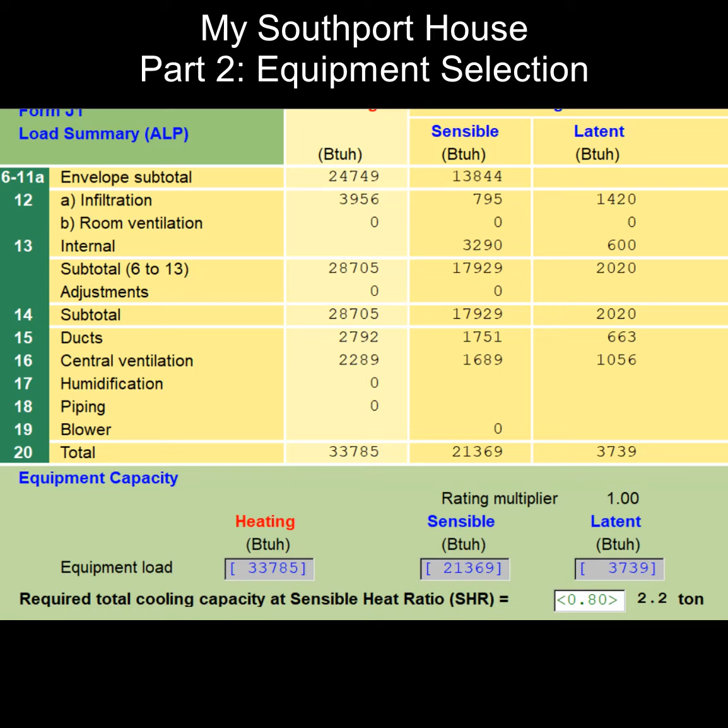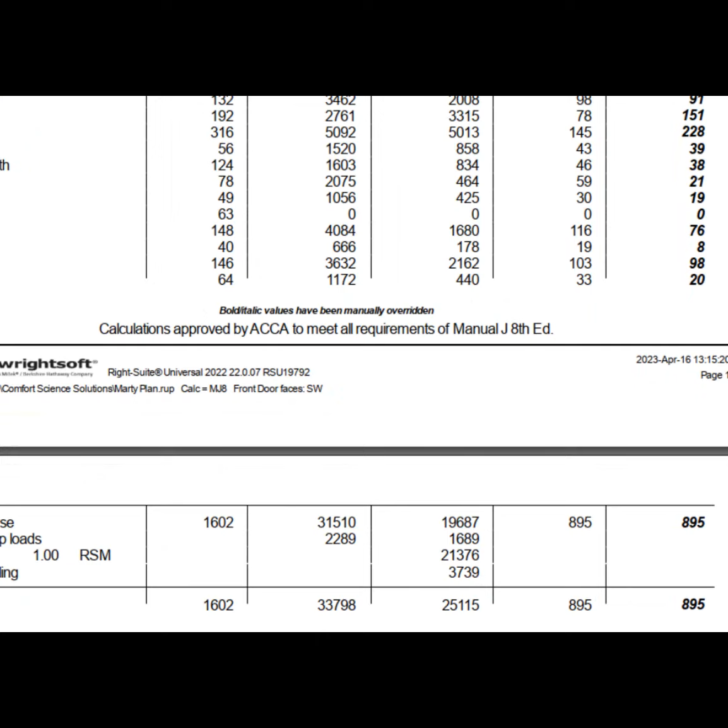Since the last video about my house, I sharpened my pencil a little bit more and got my load down from 2.5 tons to 2.2 tons by shading my windows, since we were probably going to have blinds and curtains anyway. My total airflow is now 895 CFM at this load. Now it's time for me to select my equipment.

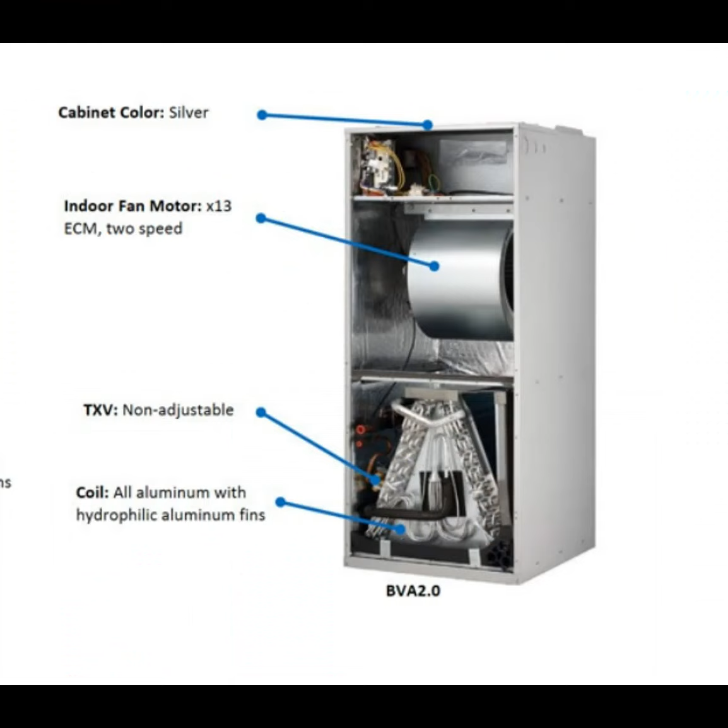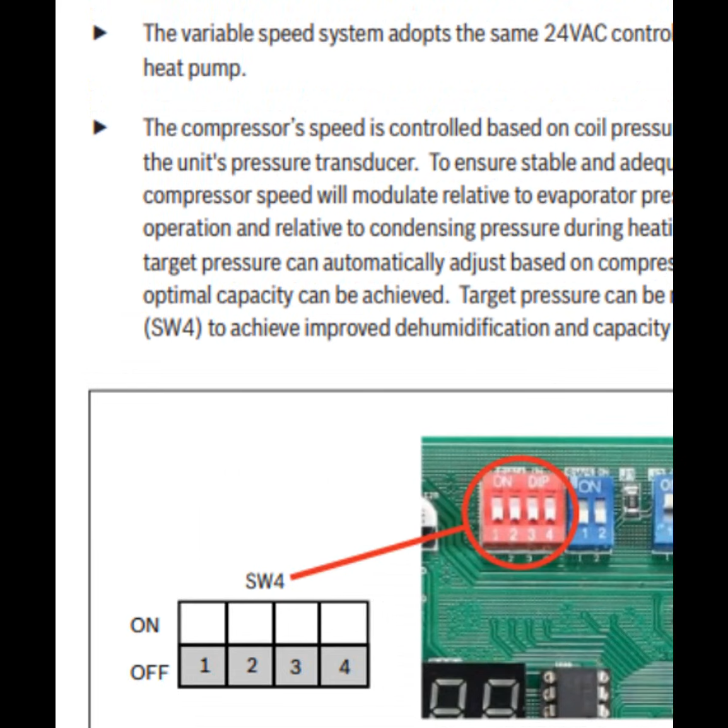I was really torn between two different approaches, a Bosch IDS 17.5 SEER and a Carrier Greenspeed 5-stage. Both have inverter compressors, but they control the compressor speed in two very different ways. The Bosch uses an ECM 2-stage blower that you would wire up to a typical 2-stage thermostat. The compressor is programmed to make a 47-degree evaporator coil, so it can just ride with the load and airflow settings and still provide very efficient cooling.

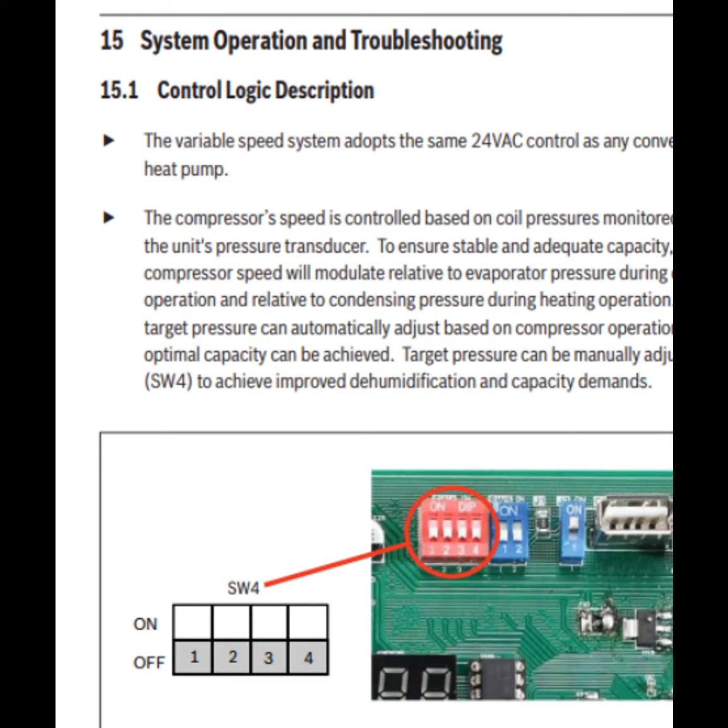It can also run on an Ecobee thermostat or any conventional thermostat. You can also turn on what Bosch calls enhanced cooling with some dip switch settings. Also noteworthy is Bosch only makes a 3-ton and a 5-ton condensing unit. The 3-ton can be set to 2 tons with another dip switch. It offers a 2 and a 3-ton air handler to match with that condensing unit.

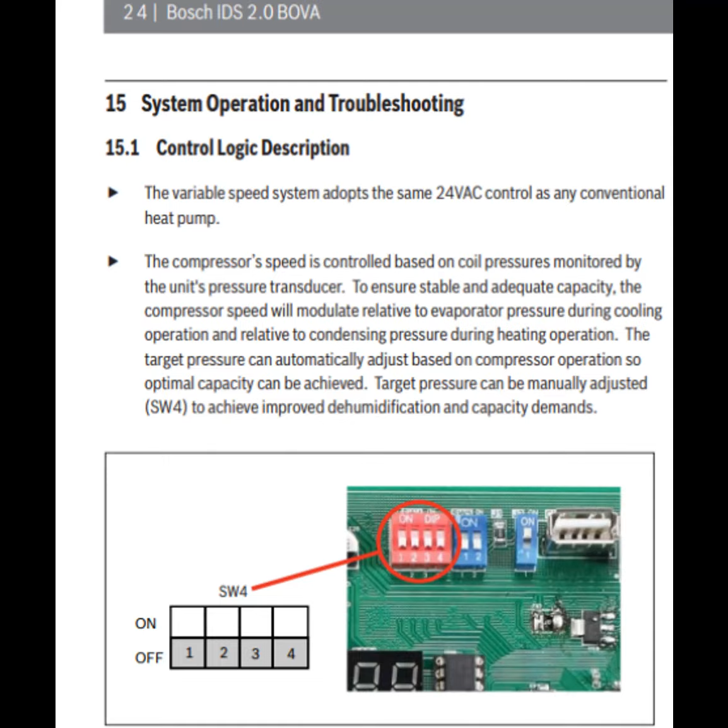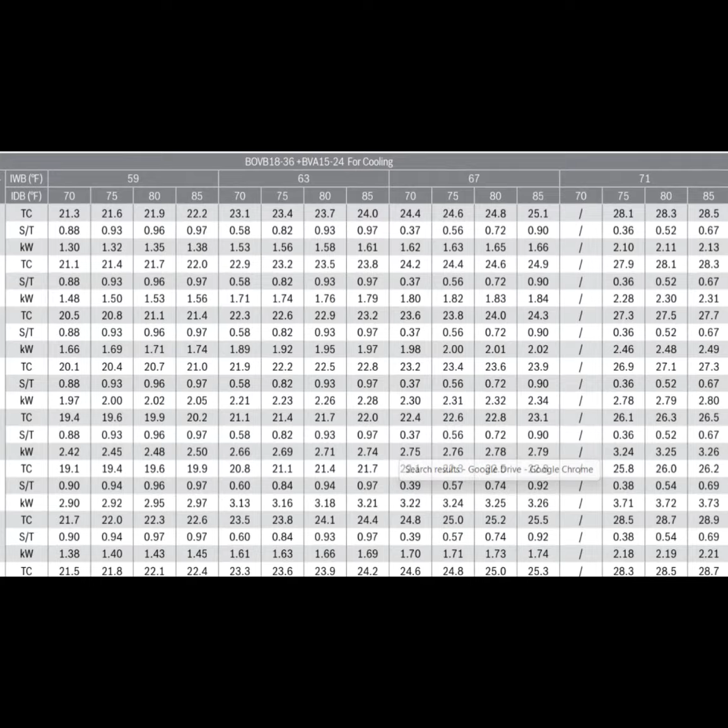The Carrier is a fully communicating system. You must use its Infinity thermostat to get all the features out of it. Bryant and ICP are sister brands that also have the same technology under different trademarks. Bosch publishes its performance specs for normal mode only. I could not find performance specs for enhanced mode, while Carrier publishes two different modes, efficiency and dehumidification mode.

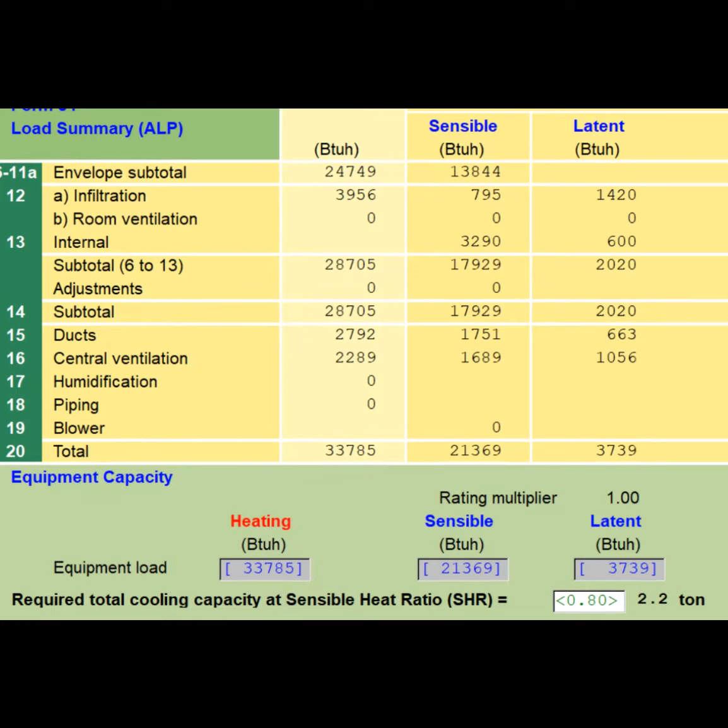I was really in between a 2-ton and a 3-ton. We always teach students to size their systems aggressively and avoid oversizing equipment. The standard for selecting which tonnage to use would be Manual S from ACCA, which says that equipment has to be within 90% and 130% of our sensible load if we're using a variable speed compressor, and we must meet or exceed our latent load.

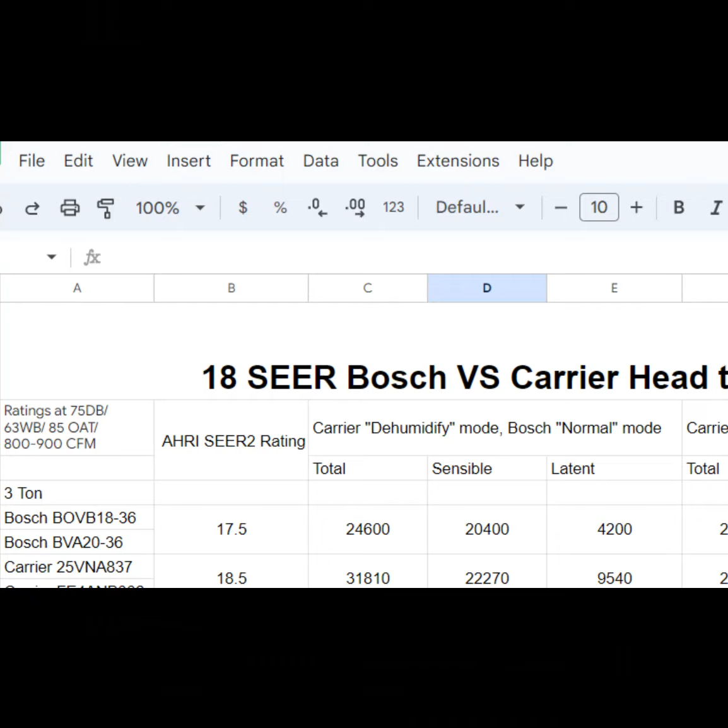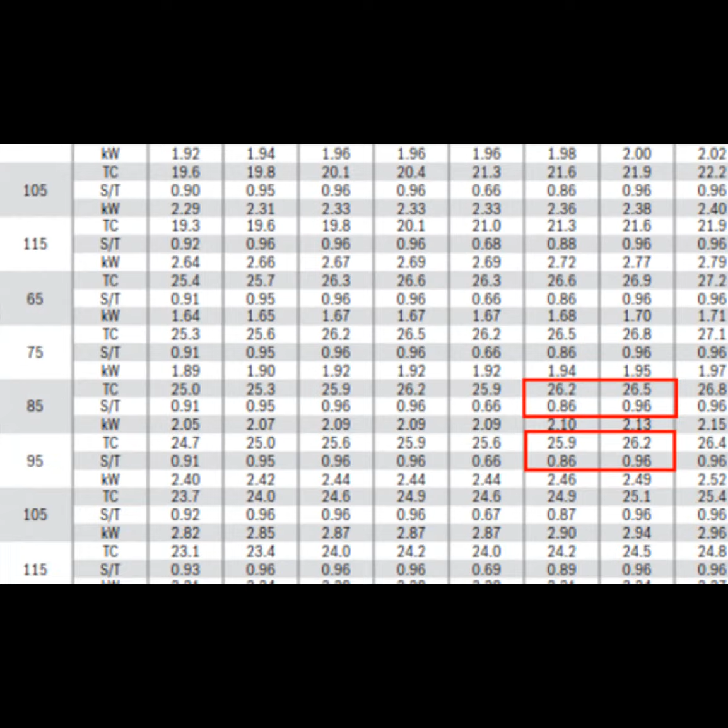So I created this spreadsheet to compare the two brands at the same design temperatures and similar airflows at 2 and 3 tons. The Carrier 2-ton would not meet the sensible load, so it was out. The Bosch 2-ton met my sensible load, but it did not meet my latent load. The only way it would meet it would be with a dehumidifier. And I didn't like the idea of relying on the dehumidifier during peak design conditions to remove moisture. So per Manual S, these 2-ton units would not work. At 3 tons, both systems comply with Manual S in sensible and latent capacity.

Now let's pause for a minute and compare the performance between the Carrier and the Bosch. The Carrier absolutely crushes the Bosch in latent capacity, which is its ability to remove moisture. The Bosch makes up for that shortfall in more sensible capacity. The reason is the Carrier runs a very cold evaporator coil, and it can really wring out the moisture from the air.

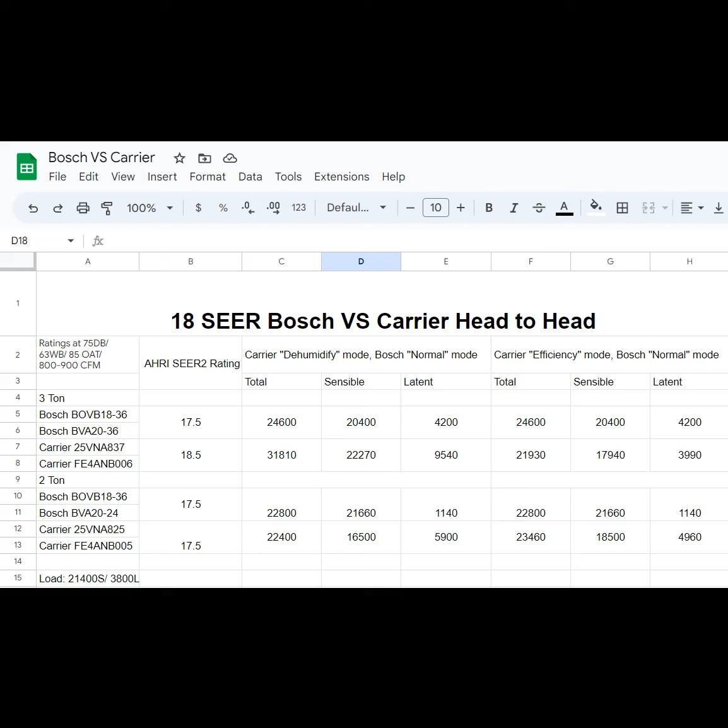Now remember, there is an unknown here. The chart only lists the Bosch's capacity and performance in its normal mode. When we set it to enhanced mode, it's going to allow the compressor to pull the evaporator temperature down to around 43 degrees, but that's still probably not as cold as the Carrier. So even in enhanced mode, the Bosch probably closes the gap a little bit, but it still seems to be more suited for sensible removal. Head-to-head, the Carrier simply outperforms the Bosch in almost every category except for sensible capacity.

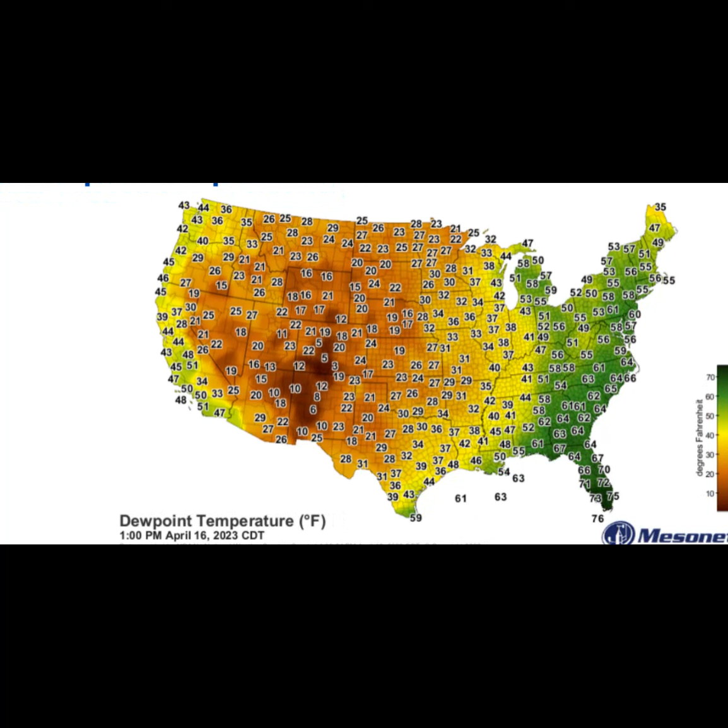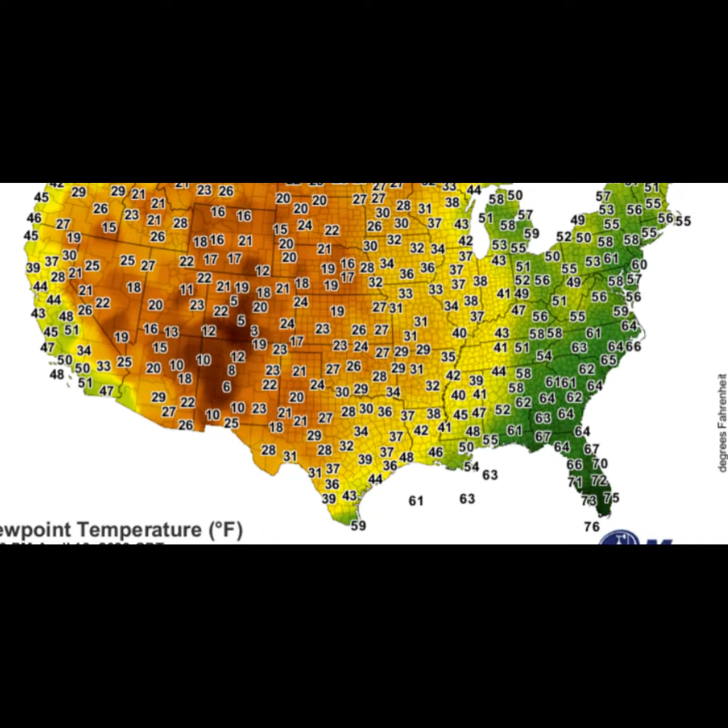But what happens when the sensible load drops, but there's still a lot of humidity in the air? And that's very common in the South, and especially for me, since I'm near the coast. There'll be plenty of hours when it's in the 60s or 70s outside, but a high dew point temperature. Because the Carrier is fully communicating, it can independently adjust the airflow and compressor speed to dehumidify very well.

And it also has a reheat dehumidification feature, which will cycle the electric strip heaters to avoid overcooling the space while it continues to dehumidify. It's very impressive. But remember, strip heaters are running during cooling season, which is going to make my power bill go up. The Bosch does not have that capability.

It only has 2 evaporator fan speeds and will maintain a constant evaporator temperature. So just like single and 2-stage equipment, there will be plenty of times when it will have to cycle off on temperature when the latent load remains, but the sensible load is very low. So what do we do with that? We have to supplement it with a dehumidifier, and I prefer the Santa Fe Ultra series.

But this is an additional piece of equipment that I have to purchase and maintain. And while it doesn't consume as much energy as the reheat strategy, even an efficient dehumidifier still uses power. So we are left with 2 choices. Either pay more now for an additional piece of equipment, that is the dehu, or pay more later over time with higher power bills. So how much more energy will this cost me?

Well, there's been some really smart people who have done a lot of case studies, but there are also a lot of variables too. Where you keep your thermostat and humidity set point, how leaky the house is, how much ventilation you bring in, how many people live in the house, and what their activities are, these all affect it. The more latent load is on the house, the bigger difference we'll see.

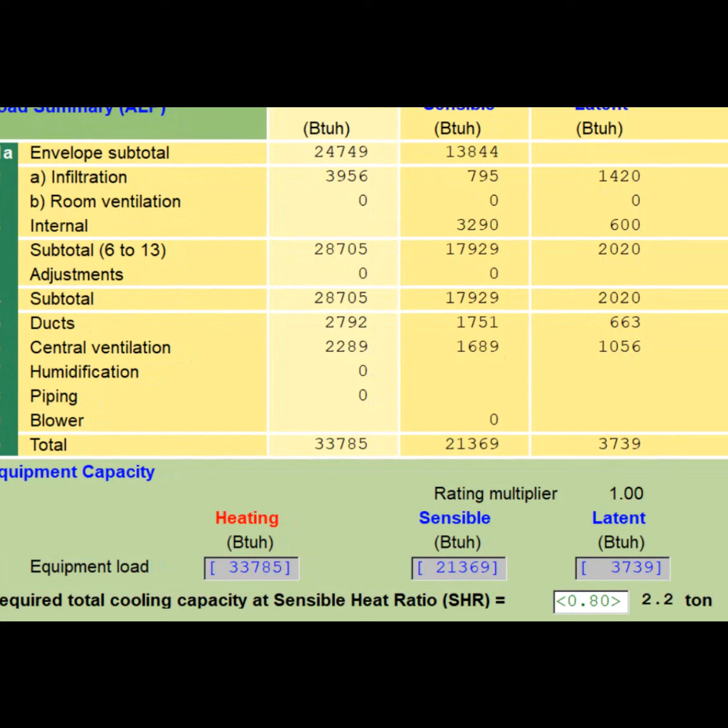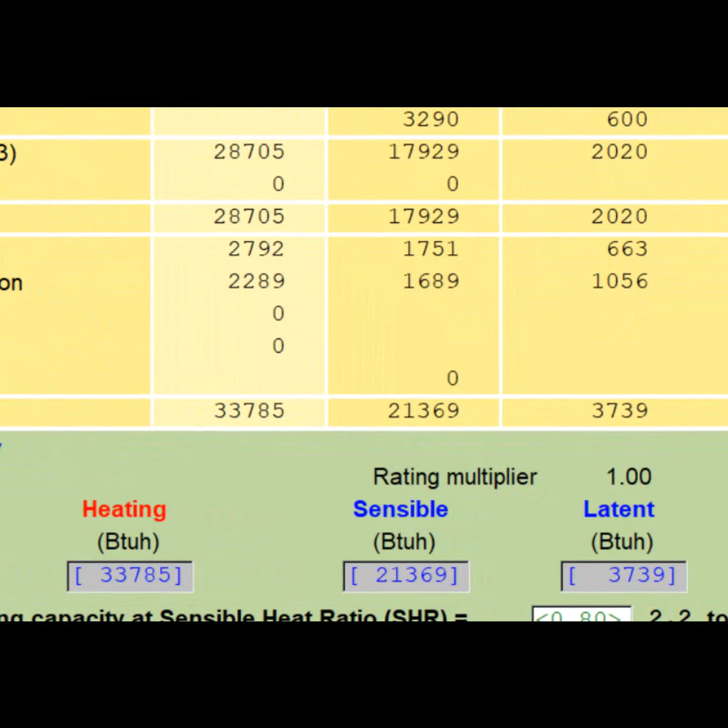For my house, because I'm trying to minimize infiltration and only ventilating on demand, my latent load should be pretty low. So either option would be a good one. But I could see a scenario in a retrofit situation on an existing leaky house where installing a Carrier with reheat would really make the energy bills higher. So good communication, setting expectations, and explaining the benefits of dehumidification are key so your customer understands what they're going to get.

I also want to address something else. Researching equipment and making those decisions using spec sheets is the right way to select equipment. It's the foundation of Manual S. Case studies are very important and they're very useful. A lot of lessons can be learned and even interpolated from them, but they aren't apples to apples comparisons. We have to be very careful about taking case studies and making broad assumptions and conclusions across a bunch of climate zones.

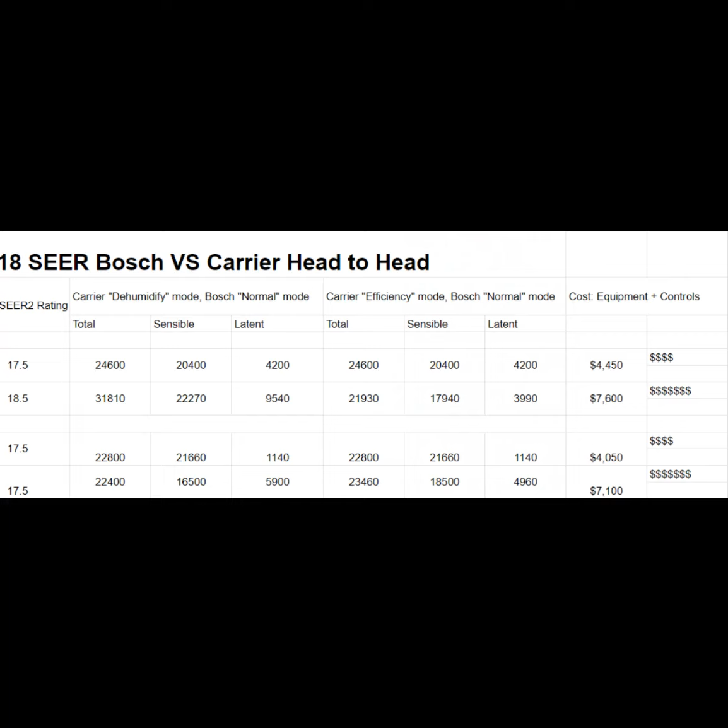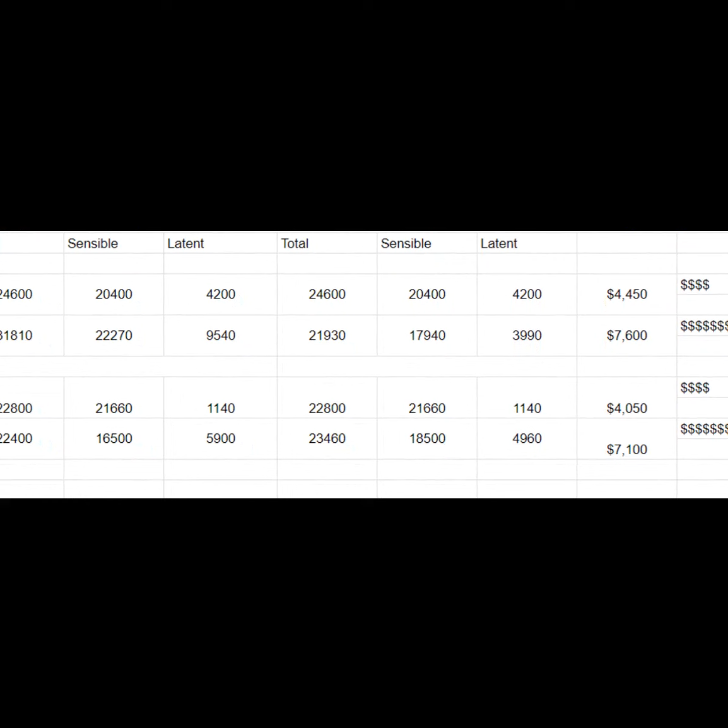Alright, back to my house. There are a few other factors. Since I'm no longer a Carrier dealer when I sold my last business, my pricing on Carrier systems is significantly higher than my Bosch pricing. Perhaps Carrier volume dealers could close this gap, but that gap is big enough for me to still be able to get a dehumidifier. And Santa Fe dehus have a great warranty and they're built to last. Another factor is that I would be stuck with a Carrier communicating thermostat, and I just don't like it. I much prefer using the Ecobee.

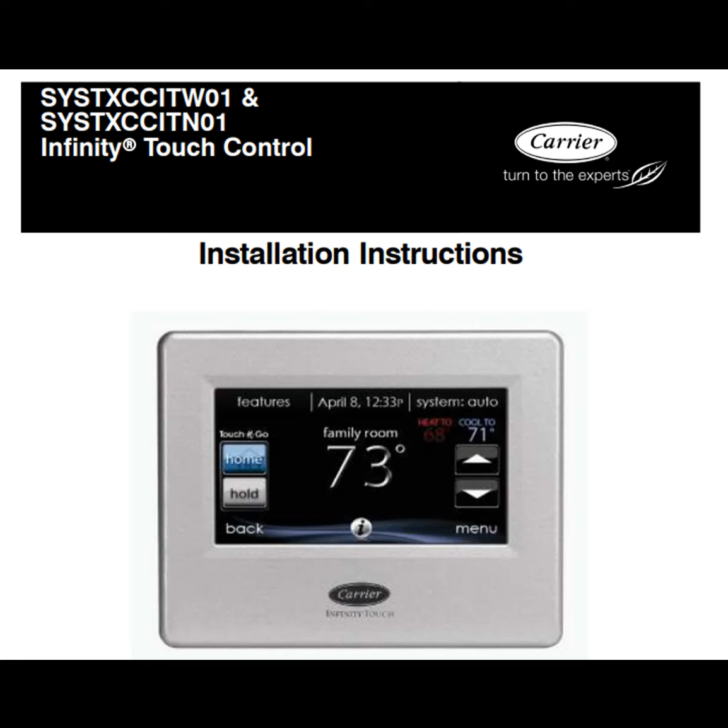Plus, my plans for my house include using it as sort of a test lab for various strategies using the Santa Fe ventilating dehumidifier paired with the Haven IQ monitor and controller. And my options would be very limited with a communicating system since they don't use conventional 24-volt controls while still being able to give you all the features.

Finally, I was very worried about the maintenance record of the Carriers, the cost and availability of parts as well. When I compared a replacement fan motor, control board, and other parts, I didn't get a warm and fuzzy feeling with the Carrier. And being a former Carrier dealer myself, I personally had some bad experiences with really long lead times. And because I'm spray foaming the attic deck, I'm going to need a dehumidifier anyway. Another video will come out about why that's the case. So ultimately, I chose the Bosch with a Santa Fe ventilating dehumidifier for my house.

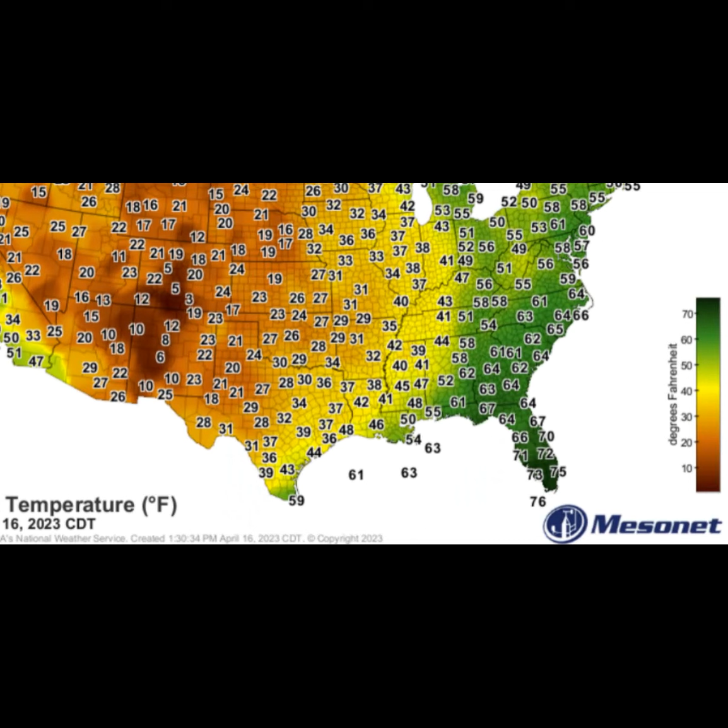But I want to reiterate, the Carrier GreenSpeed is a great way to combine cooling and dehumidification. So if you're going to sell a communicating system, there should be no reason to also sell a dehumidifier. The GreenSpeed can do both. So just be careful in humid climates like the South and set expectations for possible higher energy bills. And if you are installing single or two-stage equipment, it's best to offer a dehumidifier option with it. Let the owner turn it down if they must.

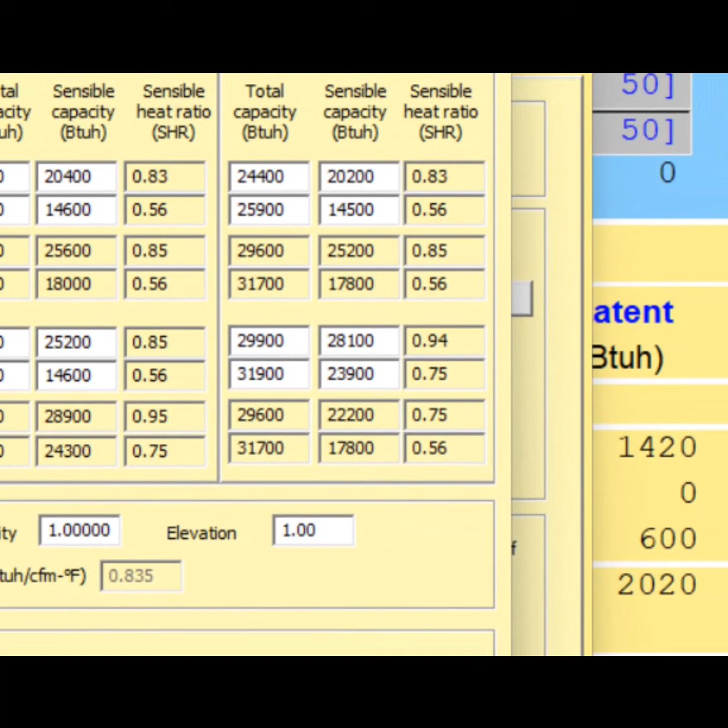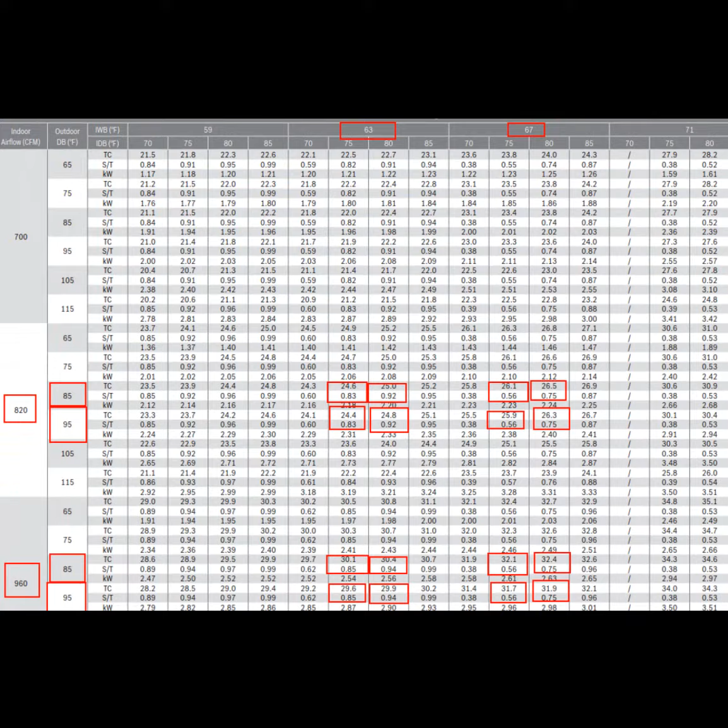Returning to my house. Now that I've selected my system, I next go into Wrightsoft and I enter in the performance information from that expanded cooling chart so it can interpolate it for my exact design conditions. This will verify that I'm compliant with Manual S for sure. The same goes in heating mode. I enter the heating capacity at 47 and 17 degrees outdoor temperature, and it interpolates what my capacity will be at my exact winter design outdoor temperature. Then I know how much auxiliary heat to include. In this case, it's around 8 kW.

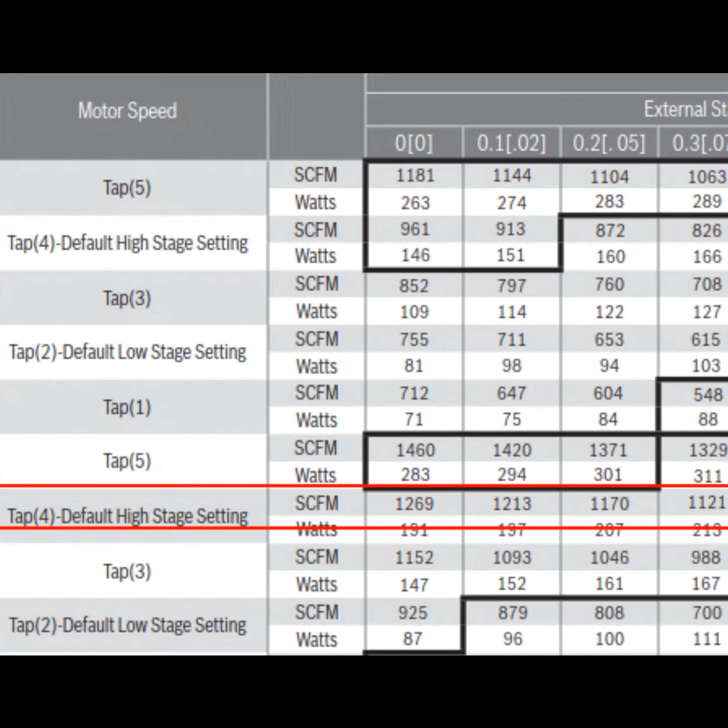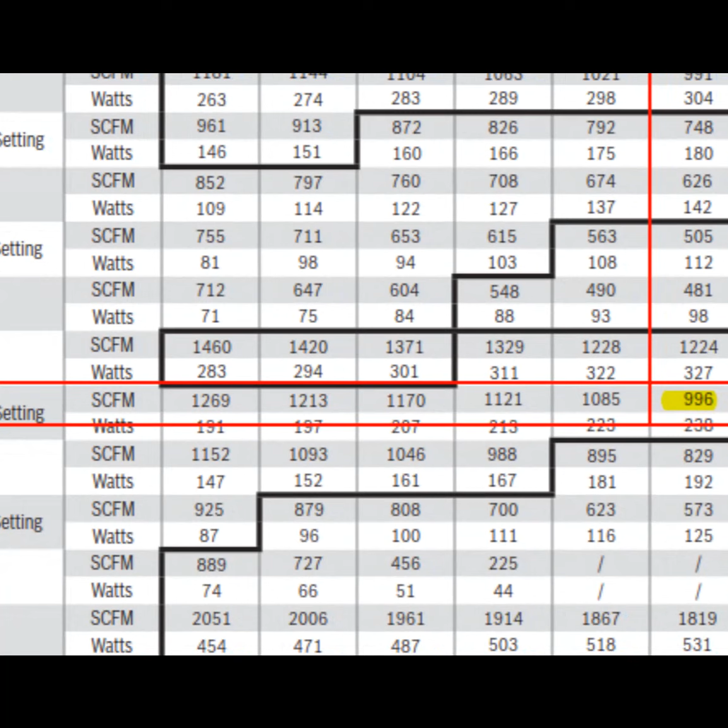The last part of my selection process was to select the fan speed at which my design airflow would be met. The Bosch 3-ton air handler can make slightly more than my design airflow at 0.5 static pressure at speed tap 4. That gives me a little bit of wiggle room if I need to speed up my fan. You never want to design a system that has to be maxed out to make the right airflow in BTUs. You always want a little bit of wiggle room up or down. So I'll make that my second stage airflow, and I'll set my first stage airflow at speed tap 2, but I can always adjust these later.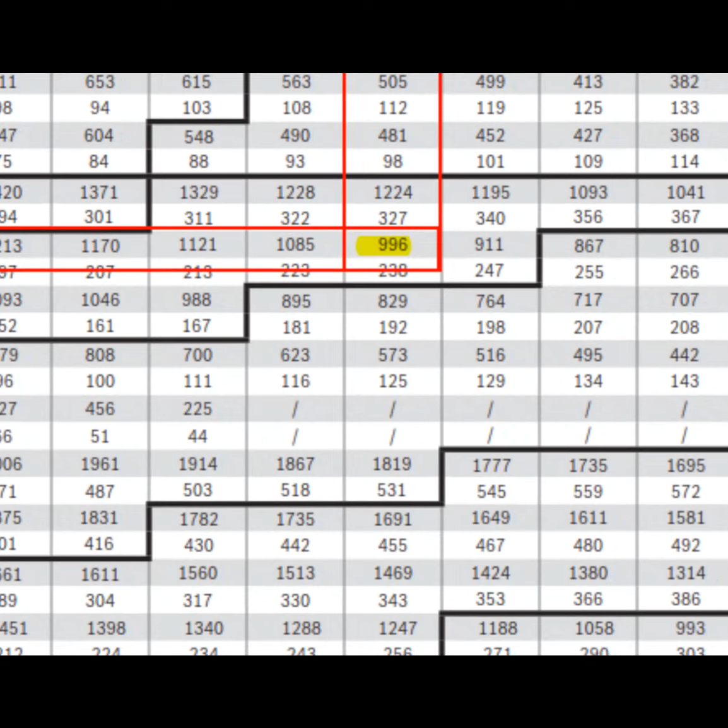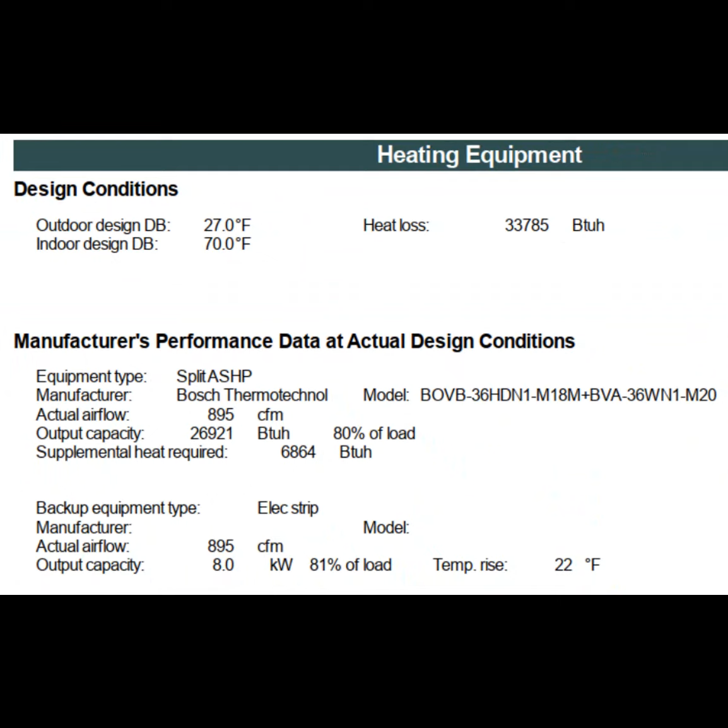As you can see, the equipment selection process is just not an automatic thing. You can't just take your Manual J and turn it into a unit tonnage. With this selection, I'm comfortable that this system will maintain my temperature and humidity while not spiking my energy bills. How do you size and select a dehumidifier? I'll cover that in a future video. Now that we've completed Manual J and S, we are ready for our Manual D duct design, and that'll be my next long video in this series.